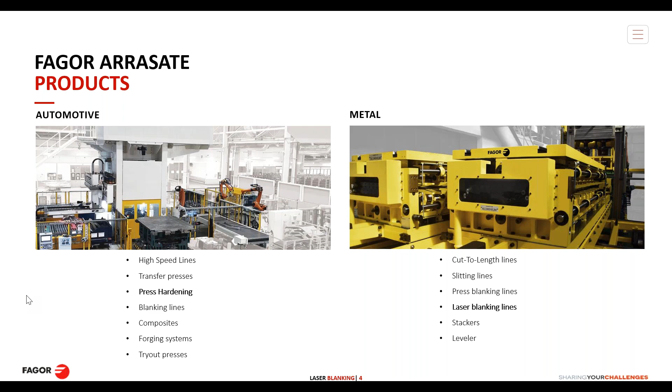After having a sales office in the U.S. for the last 25 years and a service agreement with Enprotech for the last 6 years, Fagor Arrasate is taking the next steps to be closer than ever to our customers here in the United States and Canada. Despite delays in 2020, which I think everyone can relate to, we have broken ground on the new facility regardless, and we're moving forward to complete that in May of next year.

The staff will be a mix of both expats and domestic natives. Disciplines on our staff are going to be sales, project management, controls programming, service and support coordinators, as well as spare parts. Hiring for the facility has already started. We have about 4 members hired already. One of those is a domestic employee here in the United States, and 3 of them are expats from Fagor, Spain.

And at this point, I'm going to turn the presentation over to John, who is going to focus on the technical portion of the presentation, starting with the concept of laser blanking lines. Go ahead, John. Okay, thank you very much, Matt.

So, in first place, I would like to introduce the laser blanking line concept for those who are not familiar with it. Basically, it's a blanking line replacing the press with laser cells and changing the stacker concept to linear robots so that they offer us bigger flexibility.

If we go to the inside of the cabinet, we could see that the laser area could be composed of 1 to 3 laser heads, and at the end we do have the flexible stacking system. The entry area is quite similar to a blanking line, avoiding big pits for the loop and for the press.

So now, to understand the line concept more easily, I will show you a video.

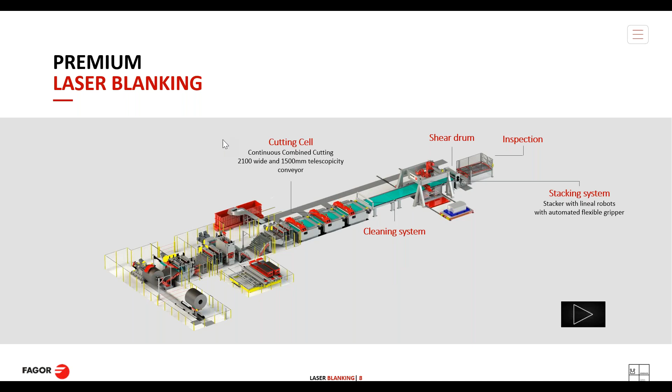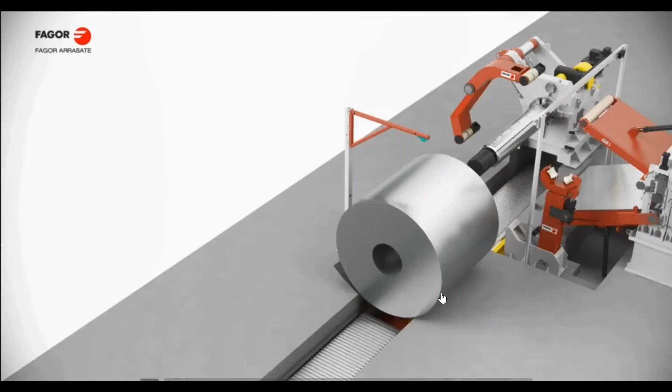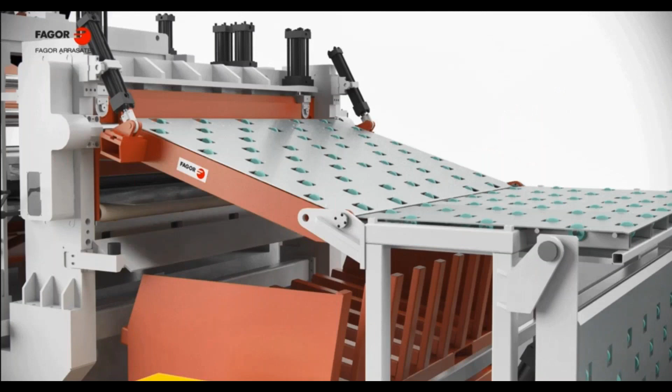The entry area, as I said, is common to cut-to-length lines or blanking lines, with coil car and uncoiler feeding unit, with a crop shear and the entry for the top of the coil. Leveling afterwards to remove the inner tensions and local effects that the strip may bring. Cassette change, we do it in less than 5 minutes.

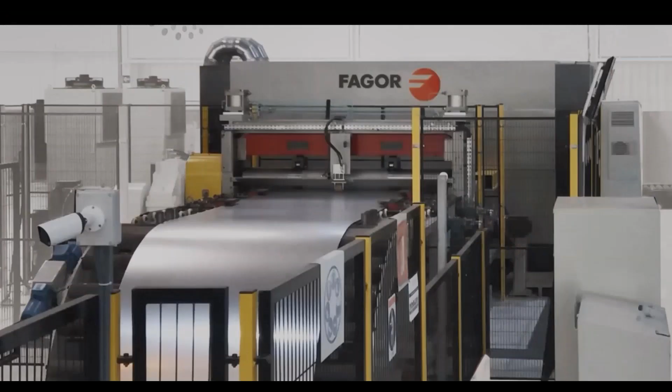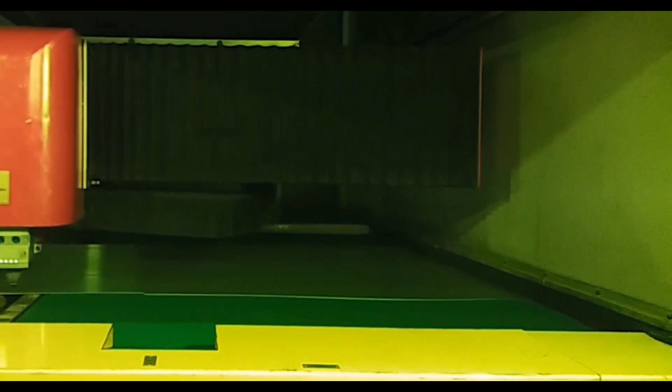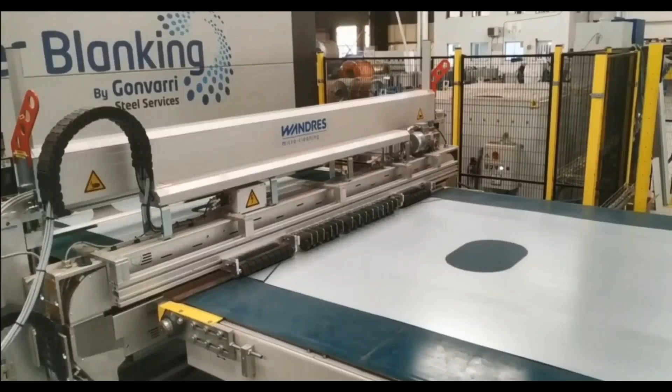Focusing on the laser area, any kind of pieces could be cut, single cutting or combined. Here, as you can see in the image, 2 lasers working together. Part of the scrap can be evacuated directly in the laser area, as you can see now, by opening the space between conveyors. Additionally, cleaning units can be added for skin panels, for example.

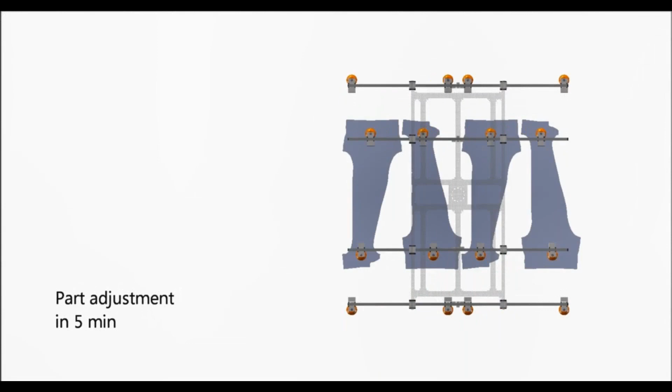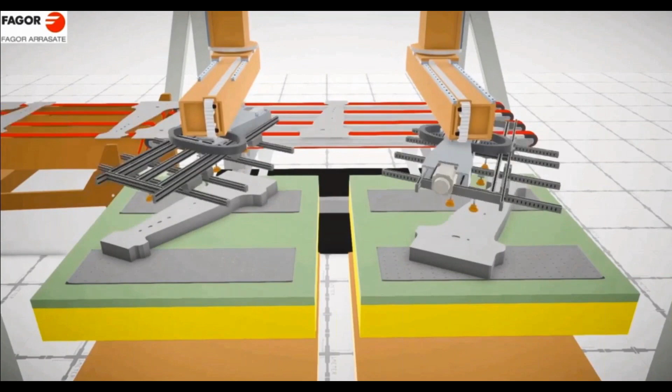At the end, we do have the linear robot stacking system with a vacuum cups gripper that, as you can see, can be adapted to the different blank shapes. Finally, the pieces can be picked up and oriented in the stacking pallets. At the end, we would have the inspection area and the rejection.

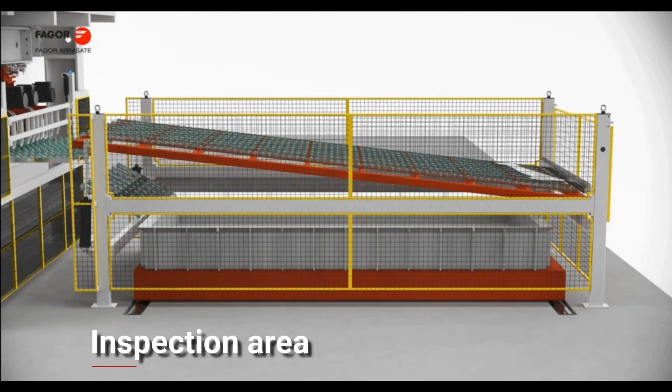So, continuing with the advantages that laser blanking technology provides the final users, in the first point we would have the most important point: the dies are not required for the cutting operation, so this leads to significant savings. For example, in the automotive industry, every 2-3 years the car models have a restyling, and every 5 years a new model is launched, so this requires new dies every certain time. The money saved there is quite significant.

And in another way, for model changing, laser cutting makes it easier to modify and go for new models just by changing the cut drawings. As a second advantage, fast changeovers are really a positive point of this technology, as there's no need to change the dies. Just by uploading the cut drawing to the system, the production can start running just by changing the recipe, and no die logistics or any other problems with die logistics affect the process.

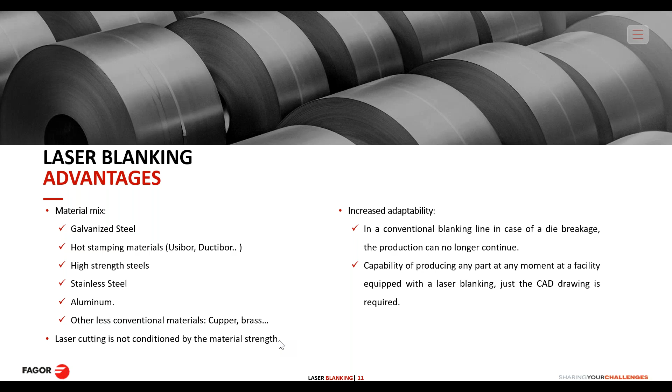About production costs, there is also a significant saving. Thanks to the nesting of the blanks, they can be positioned as desired, saving material. Additionally, edge trimming processes to adapt the coil width to the die width are not necessary anymore, so the cost of this extra process is saved as well.

Talking about energy consumption, there's a saving as well compared with the conventional blanking line. And less personnel is required for managing the line, not for operating it, but for everything related to die logistics.

Talking about maintenance, the savings are quite significant as well, as the maintenance operations are quite simple in the laser cell, and for example, qualified personnel for fixing dies, as required in a conventional blanking line, are not necessary. So in maintenance, highly qualified technicians would not be required.

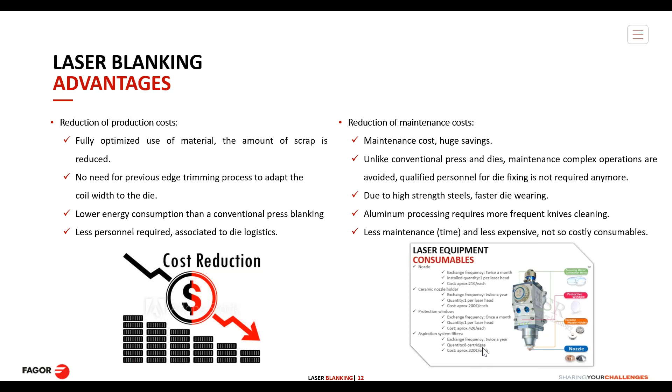About installation costs, there are quite big savings as well, as no pits, no high bay buildings, and no reinforced floor for press efforts are required. We estimated that only in foundation, over 600,000 euros can be saved.

And finally, there's a big space saving due to the absence of that as well.

We go through the productivities that the laser technology can achieve. With the laser technology, we have divided it into 3 different groups. Firstly, we have the inner parts, A pillars, B pillars, and other reinforcement parts that could achieve up to 25 parts per minute throughput.

Then there would be some simple blanks like rectangles, omegas, trapezoids. Those are quite fast parts, up to 35 parts per minute. And finally, large panels like side panels, up to 10 parts per minute.

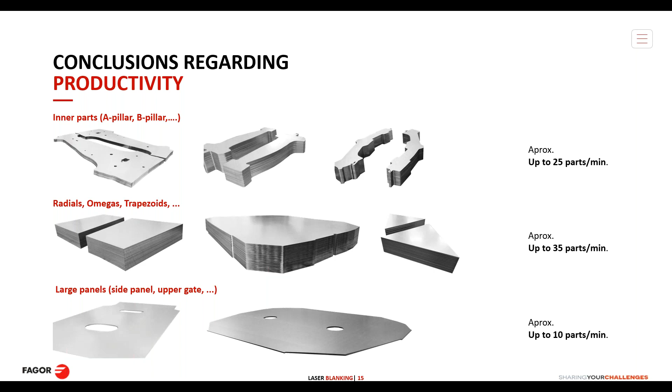There's a good point here: laser cutting allows us to make some modifications in the blank geometries, and these slight geometry modifications may lead to substantial improvements in throughput.

About the cutting quality, by laser cutting, the following tolerances can be achieved. As single cutting, we can achieve up to 0.4 millimeters tolerance. These blanks are cut by a unique laser head. Then by combined cutting, meaning the shape has been cut by two or more laser heads, the tolerance goes up to 0.7 millimeters.

Talking about linearity, the linearity that can be achieved is less than 0.1 millimeters per meter, and the burr is always below 5%, and in many cases nearly zero.

Additionally, a library is available for different materials and thickness couples, in order to achieve the best cutting conditions and the best cutting quality. Parameters such as the standoff, which is the height from the laser head to the strip, the gas pressure, the focal length, and so on. The library for different materials and couples is available and optimized for each case.

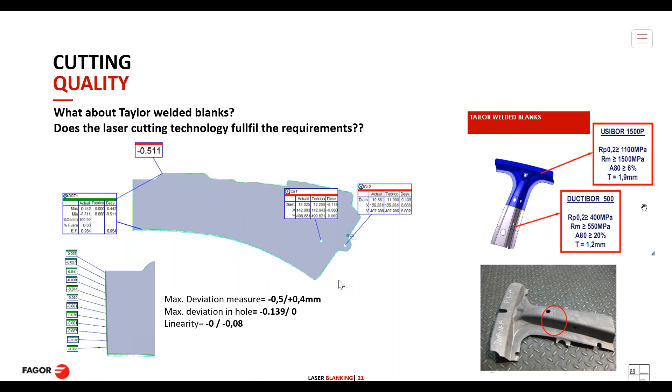This is as well a real example, and here we do have another real example of a tailor welded piece for a following tailor welded process.

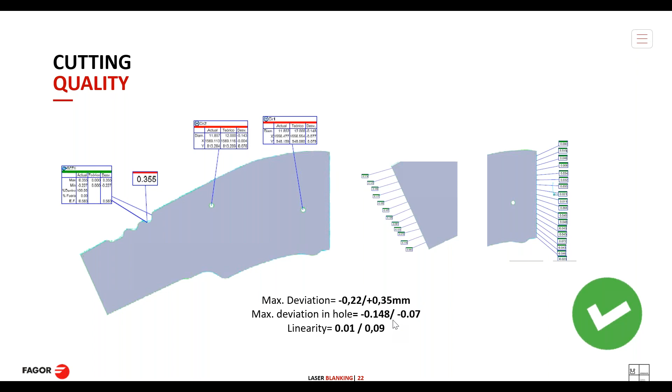So by mechanical cutting with a conventional die, the shearing process, especially with high strength steels, may provoke some edge micro cracks that could lead afterwards to blank fractures in the following stamping process. I'm talking in this case about cold stamping.

Additionally, as I said, less burr than in a conventional cutting process is generated, and this burr excess could also be a problem, because if in the forming process this burr is released, it might get adhered to the stamping die and generate some marks.

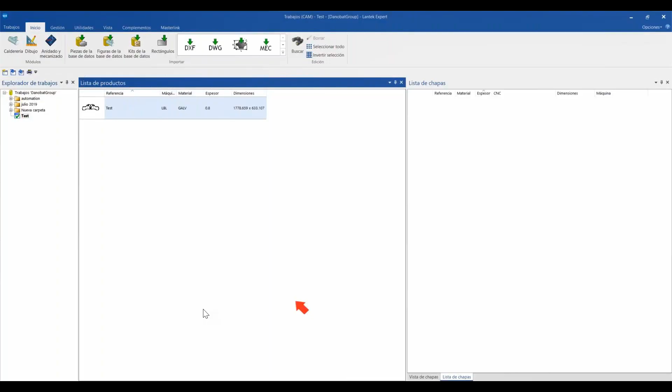This is an example of how easy it is to manage the nesting software. First, determine the area according to the coil specifications. Then we directly upload the drawing and position the piece as desired.

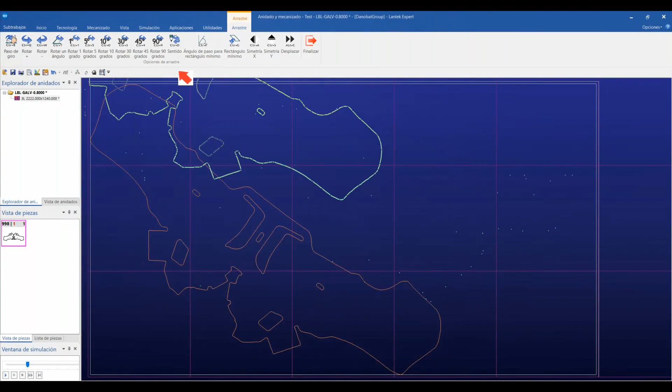This nesting can be done manually, or the software does it automatically. But by doing it manually, the human is capable of seeing different configurations that lead to a more optimum solution.

The pieces are picked on the fly, and multiple parts could be taken at the same time and then located in different positions. As I said before, if in the nesting a multi-piece cutting nesting is set up, as the one we can see here, which is a common distribution in hot stamping...

Those pieces could be cut, and afterwards the stacking unit will take the pieces and reorient them in order to position the blanks as required for the following hot stamping process.

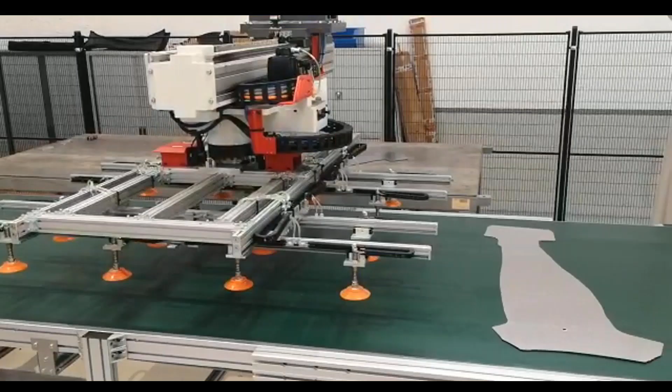This is quite interesting. Here we can see how the pieces could be taken on the fly and oriented afterwards in the pile as wished.

As a last point, I would like to highlight how laser technology can help us reduce the time to market in a new model launching process.

From one side, the blanking die and design manufacturing are not required. I'm talking about the cut blanking, not the hot stamping die. This leads to shortening the launching process by a couple of months.

Additionally, in the industrialization of hot stamping parts, it is an iterative process until the optimum is achieved. It's a trial and error process where different blank shapes need to be tested in order to see how the material flows in the hot stamping die, and to see which is the most optimum geometry.

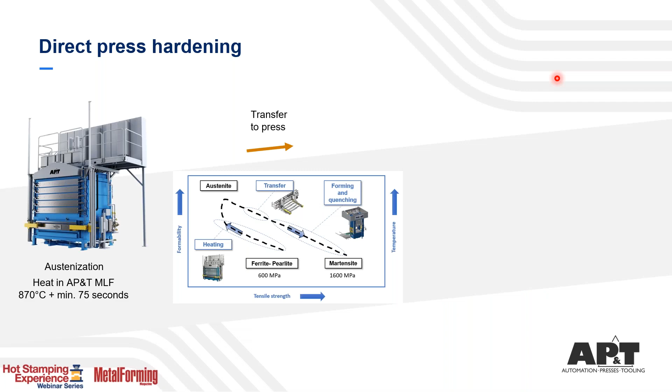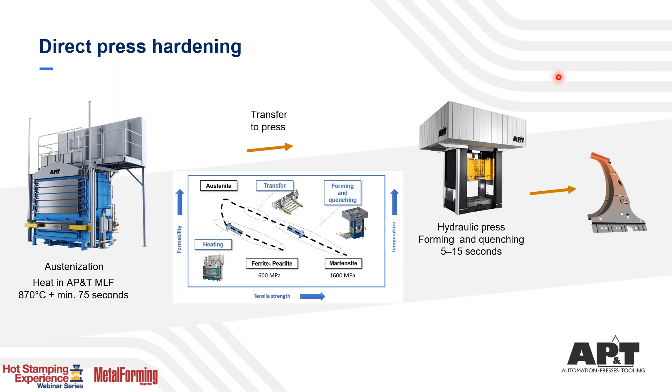I would like to go into the quality influencing process parameters when talking about direct press hardening as the first part of my presentation. Everyone in this meeting knows about direct press hardening. We have an austenitization phase in a radiation furnace, a transfer to the press where we do the forming and the quenching, and then we get a final hardened part out of the quenching die.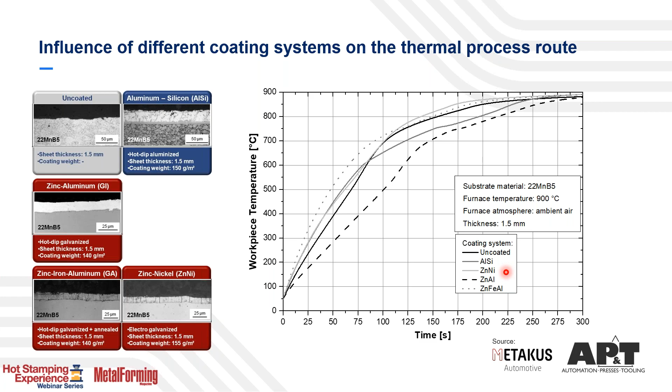Next on the chart here is a comparison between different coating systems. The chart shows uncoated material, aluminum silicon coated material, and zinc coated material. You see clearly, depending on which coating you use, you have a different heating characteristic on your material. So you need to know in your press hardening process what type of material you use, because this heavily influences your thermal behavior when heating up the material.

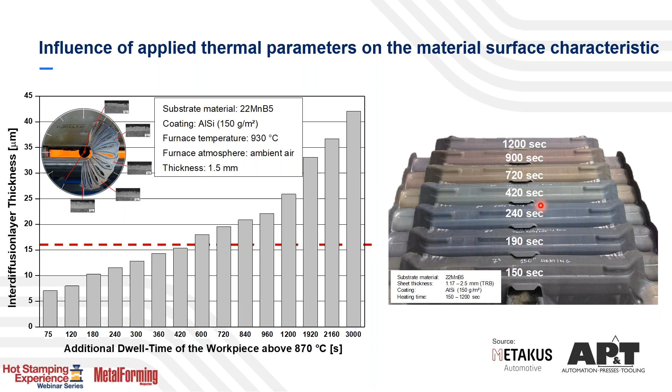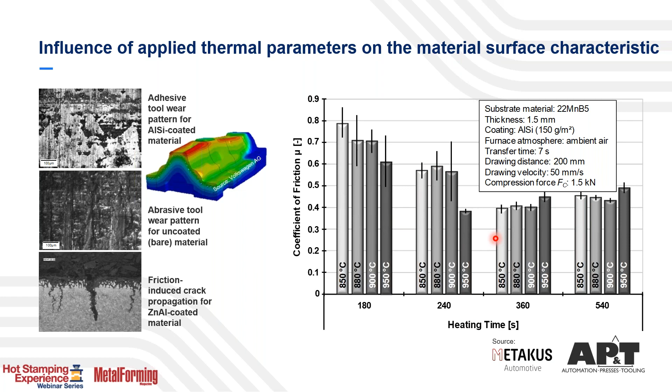On the next page, we see the influence of different heating times and different final temperatures on the coefficient of friction. That's very important to understand in the press hardening process, especially when thinking about die wear. High roughness leads to more adhesive and/or abrasive tool wear, which of course we'd like to avoid. So you need to find a temperature-time setting which gives the best results in terms of the coefficient of friction. We're somewhere in this area here, where you can manage less abrasive die wear, and you don't need to maintain your dies as often.

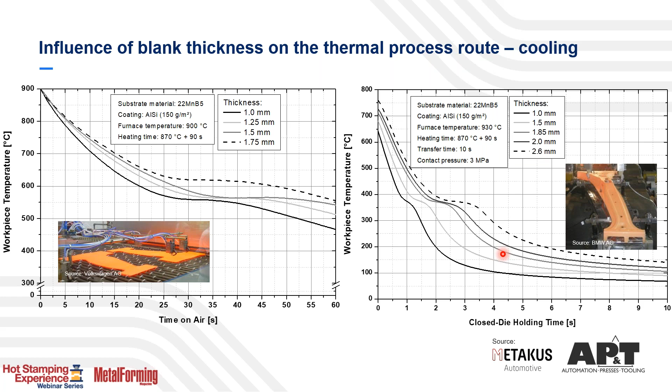Then we have the influence after forming. We had the heating process, the quenching process, and now we're going into the cooling process. Different sheet thicknesses affect cooling when transporting the blank in air, prior to hot stamping, and here we have different quench rates for different thicknesses during the quenching process. So depending on which sheet thickness you're using for the final component, you need to calculate with different cooling rates while transporting the blank in air. The same goes for quenching in a die—larger thickness requires a longer quenching time, or closed die holding time, in the tool.

It costs a lot of energy, but it's actually not needed because you need to find an optimum contact pressure to apply in order to get sufficient cooling. So it's a trade-off between cycle time and energy consumption.

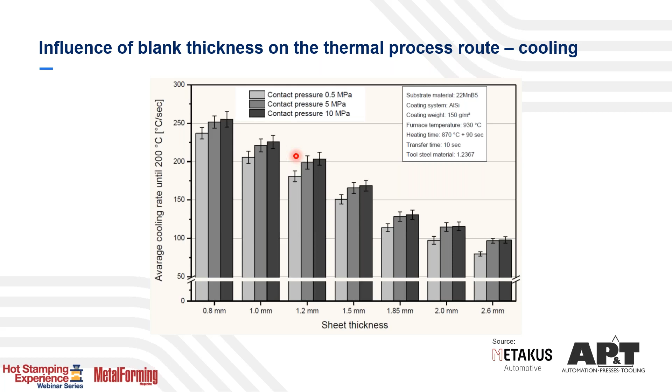That is your process window, where you can still reach the right properties in your final coating, in relation to total coating thickness in the final state, and also the thickness of the interdiffusion layer. Since this presentation will be sent out, I think this should be one of the standards for defining or setting up the heating process in press hardening lines.

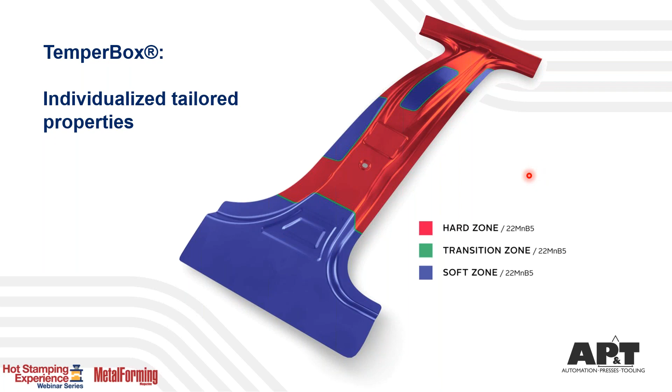I will go a little bit further into the process. Similar to the direct process we have in austenitization, here's an example of a multi-layer furnace. That's our own product.

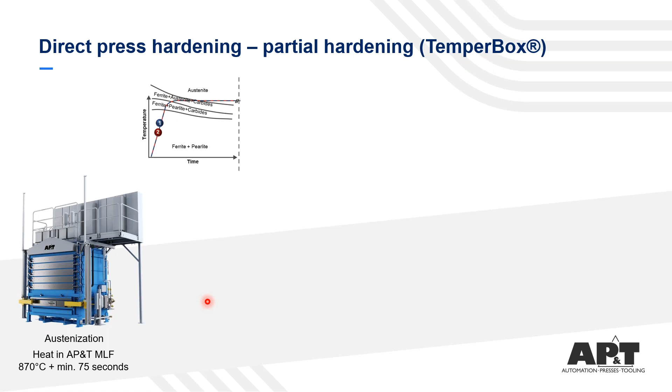This is the new product, basically, where we combine conventional multi-layer furnace chambers, five pieces of them, with a temper box in the bottom of the furnace. You will see some product pictures later on as well. So we have the austenitization.

After the austenitization, we transfer the blank into the temper box. Depending on the final mechanical properties you would like to reach, and depending very much on sheet thickness, we have a time inside the temper box that varies roughly between 30 and 70 seconds.

So what we are doing in the temper box is keeping certain areas that we want to have hard after the quenching process on temperature in the austenite state, and the other areas we actually cool down close to the transition from face-centered cubic into body-centered cubic, into the ferrite-pearlite state. Because when quenching this part, certain areas in austenite and certain areas in ferrite-pearlite will not be martensite afterwards, which means they will be soft areas.

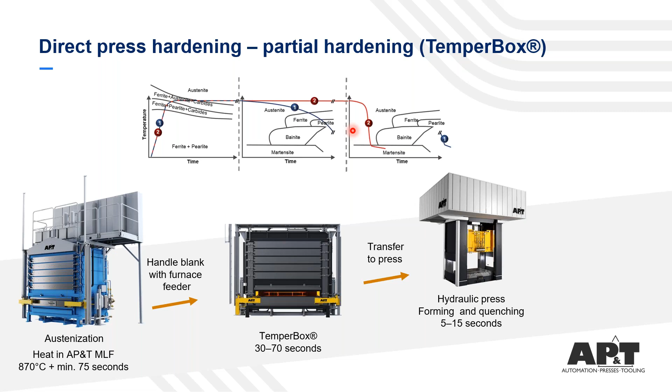After the heat treatment process in the temper box, we conventionally transfer the blank into the press, into the forming die, where we have, again depending on sheet thickness, a quenching time between 5 and 15 seconds. And what you get is a part with quite localized tailored properties, if you wish so.

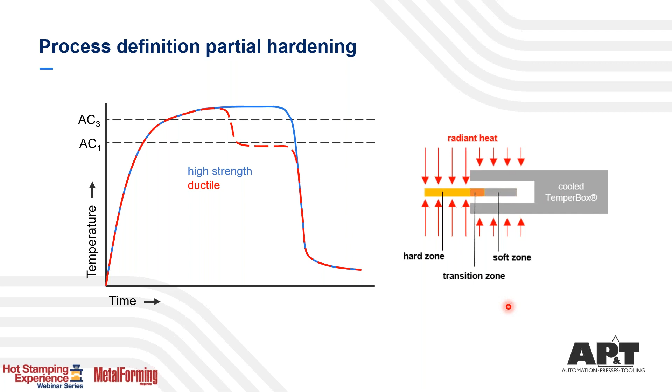How does the process look like for the temper box? As I said before, we have the austenitization, we have the local cooling, and certain areas we keep on temperature. How do we do that? Inside this temper box, inside this furnace cavity, we have the so-called cooled temper box, which is basically water-cooled masks, where we block certain areas on the blank from the radiation inside this furnace chamber. And what we achieve by blocking these areas from the radiation is, you will see on the next slide, a cooling effect which is similar to cooling the blank on air.

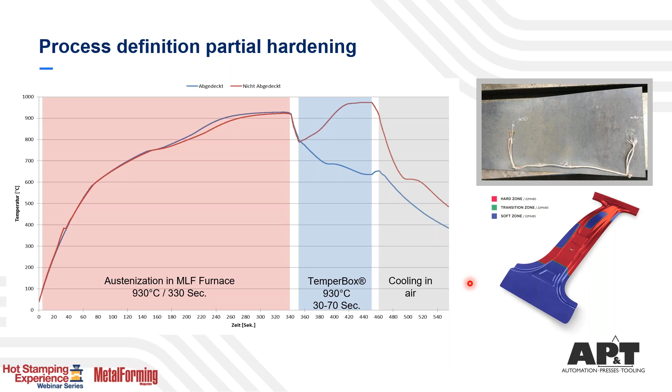I also brought you a short video, which I would like to start now. This is a prototype line at a tier 1 in Germany, the company Gedia. We have been heavily working together to industrialize this temper box technology. What you can see now is the conventional austenitization chamber in our multi-layer furnace, and the furnace feeder fork then transfers the blank into the temper box, where you can already see now the two cooled masks.

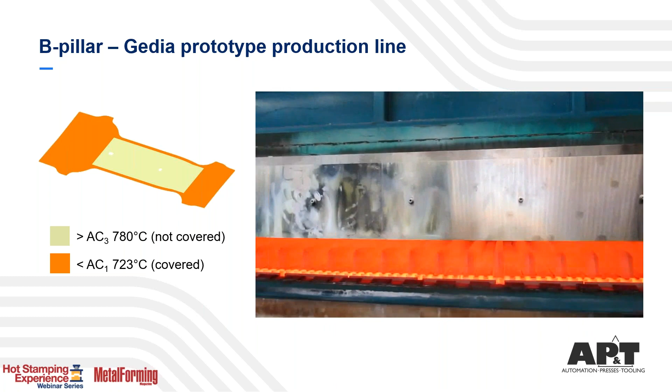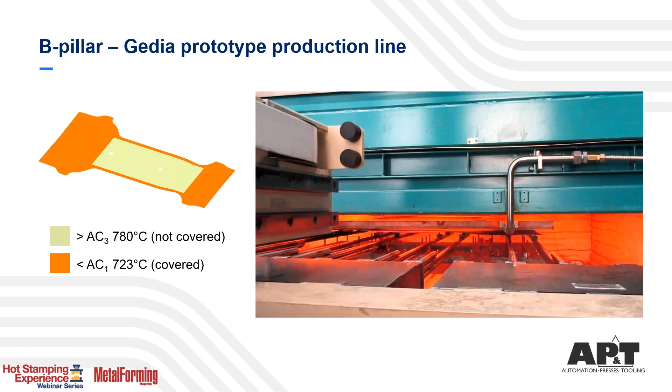We drop the blank on pins and move the lower mask towards the upper mask, so that we have the same distance between mask and blank on both sides. We keep it in there, as I said before, depending on sheet thickness, for 30 to 70 seconds, depending also very much on what type of mechanical properties you would like to reach. So thank you very much to the company Gedia for providing us this video.

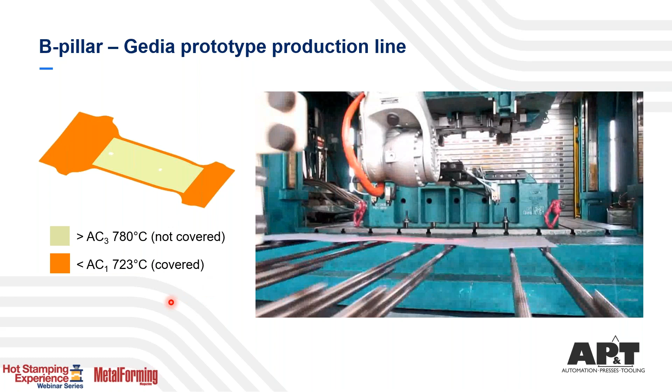I would also like to now go into further details. One important topic for tailored heating is, of course, the transition zone. And here the temper box provides a neat functionality, because we can actually vary the transition zone. How to do that? I think we should discuss in a more private discussion, but we have possibilities to vary the transition zone from hard to the soft area.

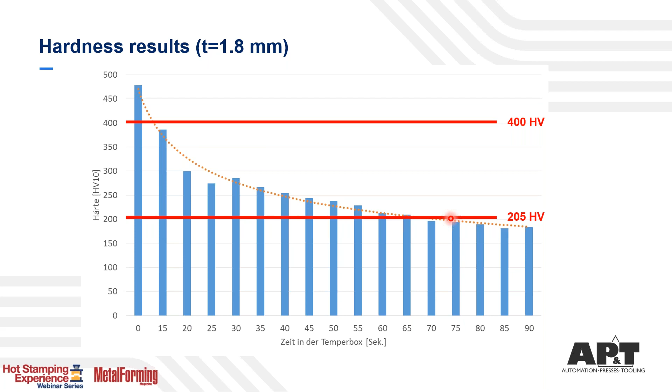So if you have the blank too short in your temper box, you will not reach the lower end or the upper end of the soft zone. If you have it too long in the furnace, you basically reach the properties of the soft zone, but maybe you lose in cycle time. So what I wanted to pinpoint here is that it's really important to know the process you are going to follow and which parameters you should set in your press hardening line.

In my next slide, I would like to show you what we think is the new standard of press hardening lines, and we are very proud that we already had the possibility to deliver these types of lines. Maybe some information on the side: AP&T is the market leader in press hardening, because we have delivered more than 120 press hardening lines on a global basis.

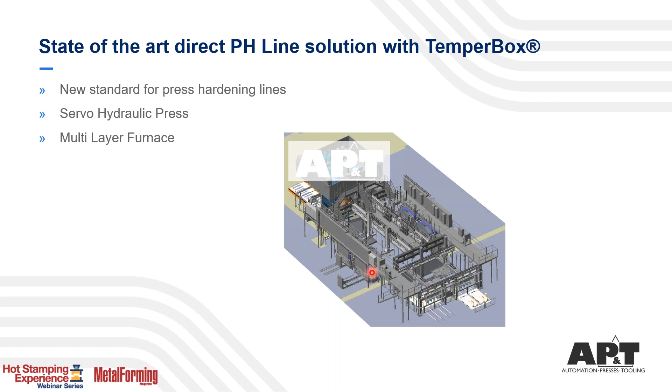In this line, typically we would use 4 towers of this multi-layer furnace combination with temper box. In total, we have what we call furnace feeders - those are the feeders that feed the cold material into the furnaces, and also the hot material from the austenitization chambers into the temper box, and out of that into either the centering table or directly into the press, into the forming die.

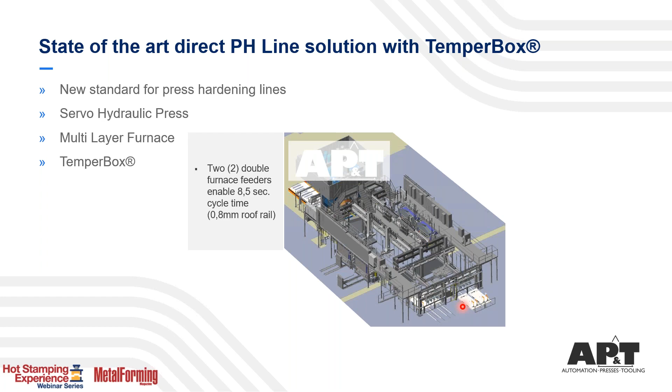If we run monolithic parts, and that's the nice thing with this press hardening line, we can run either the temper box process or conventional press hardening to create monolithic parts. If we run monolithic parts for a 0.8 millimeter roof rail, with those 4 furnace feeders in total and 20 austenitization cavities, we do reach a cycle time of 8.5 seconds.

A footprint of such a line is 16 by 16 meters, and this is what we have been focusing on from the very beginning since we started using our own furnace concept - reduction of floor space, which you can also see on this type of line, achieving quite a small footprint.

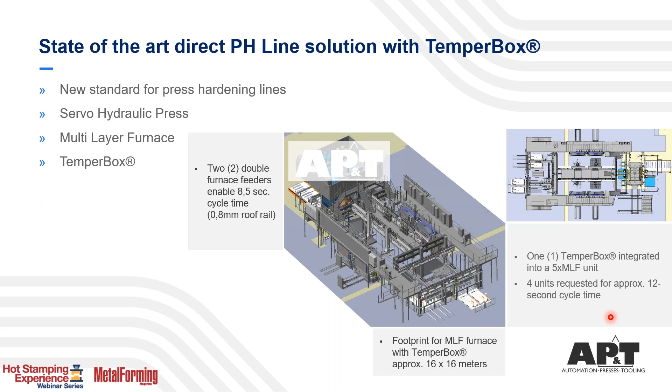As I said before, we have 4 of these multi-layer furnaces, including the temper box integrated. And if we would go back to a 1.5 millimeter thick material, we are able to reach cycle times of 12 seconds with this type of layout of our latest press hardening line.

Now, the second part, why I did all this introduction, is actually the inline process monitoring. The question here is how to monitor quality-influencing parameters. So the first part of the presentation was the introduction to what is actually important to watch in the press hardening line, and now I come to the inline process monitoring part.

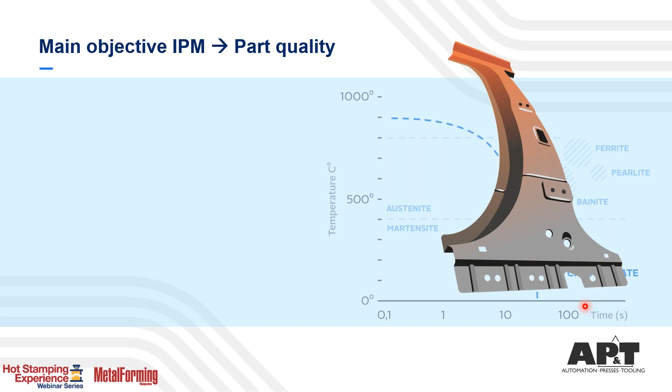The main objective here is, of course, part quality - to detect process variations and faults, to limit those variations and faults, to also detect die and machine wear, and process and product traceability, one important reason for having inline process monitoring, and of course log files to report to OEMs in case they would like to see those specific log files.

In addition, we can think about process and line optimization. It's an important part when you would like to optimize the process and the complete production line, also for energy consumption optimization. It's important to have this inline process monitoring in place, and for reduction of the scrap rate. What are the most important parameters for process control?

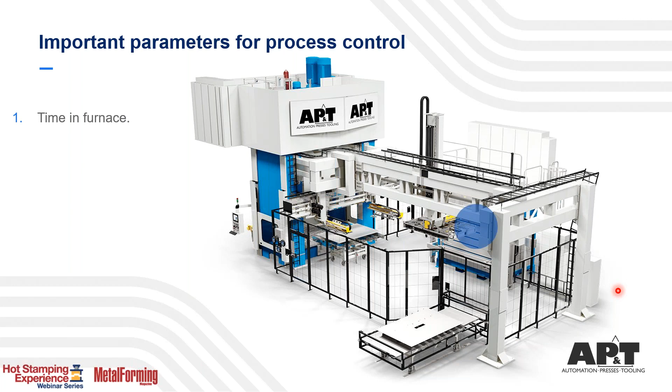We have here sketched a small tryout line, as we also have it at our headquarters here in Sweden, in Ulricehamn. The first parameter we need to monitor is time in furnace. Secondly, the temperature in the furnace - we all heard these influencing parameters in the first part of my presentation, now you see that you need to monitor them as well.

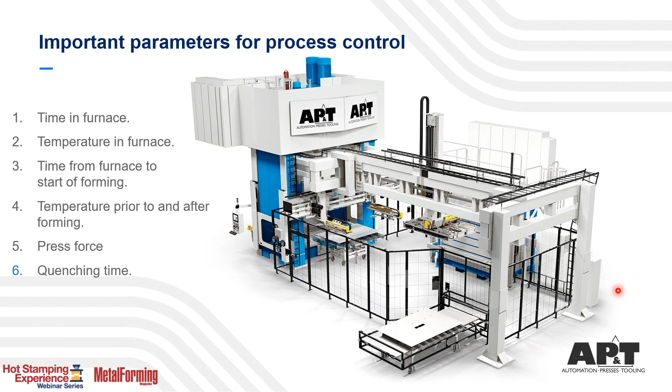Then the time in air from furnace to the start of forming needs to be monitored, temperature prior to and after the forming, press force, quenching time, the cooling water flow and the cooling water temperature, and hotspot detection after quenching.

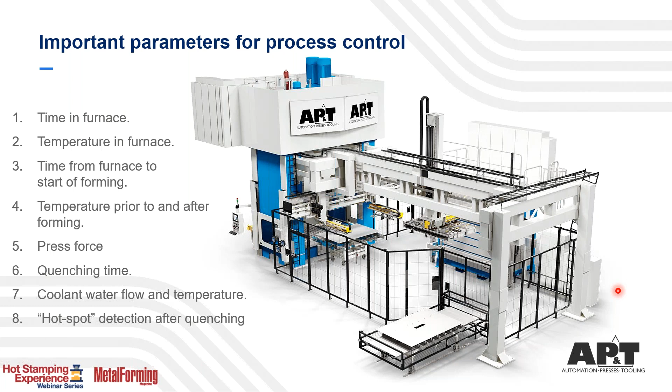Those are the most important parameters that we would like to monitor and later on also control in a press hardening line. How do we do that? What type of equipment do we use as our standard?

We use Siemens as our partner for the automation part of our product portfolio, with the Siemens PC installed on the floor on a floor standing cabinet. Pyrometers we use from the company Keller, thermal imaging cameras from the company FLIR, and also from FLIR those motorized pan tilt units.

The motorized pyrometers with automatic repositioning for temperature detection are based on the front and the back of the press, where you measure certain spots or certain areas on the hot blank when going into the die and before quenching, and then as well after quenching.

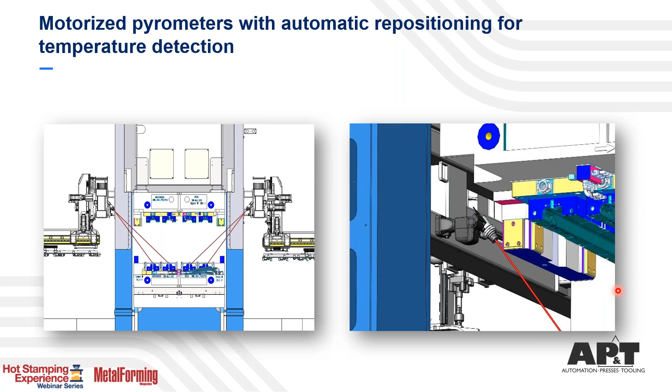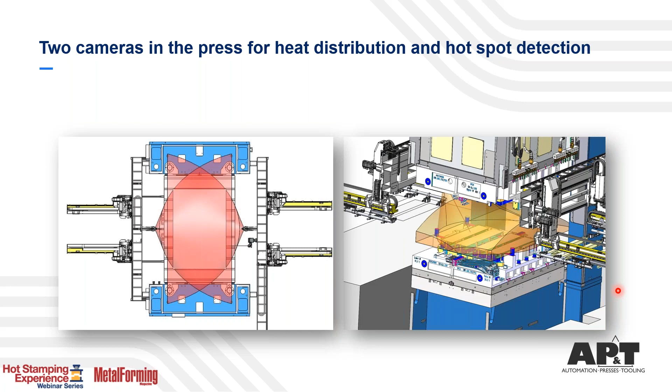Two cameras that we would recommend to install, where we have incoming temperature measurement when coming in with the hot blank, as well as after opening the die, where we have hotspot detection. So we measure heat distribution in the blank, which gives you an idea about your heat treatment process in the furnace, where you can detect failures if something is wrong. And more importantly, hotspot detection for checking on die wear, an important parameter to watch.

In addition, we offer cameras for part positioning in the dies to see if parts are possibly misaligned. So what do we recommend as a complete system? At least one motorized pyrometer, depending on how many cavities you run in your dies, and two thermal imaging cameras, and of course the process control system.

What we achieve with this recommendation is easy targeting. All the parameters and camera values are set on our HMI, our main control panel. We have a short setting time when introducing new parts, and an automatic setting during product change.

We can look at heat distributions prior to quenching, which goes as well for tailored welded blanks and tailored rolled blanks. There's also hotspot detection in stereo view after the quenching, after opening the die again, and the optimization of quench time depending on how much temperature is left in the part when opening the die. This system fulfills all the demands for CQI-9 conformity.

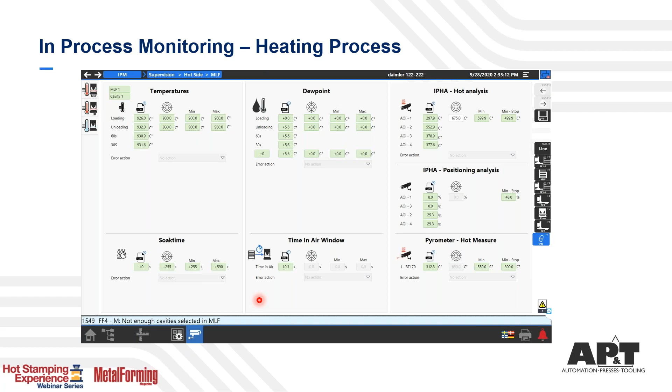This is the monitoring part as well as the control part, because what we can do here is set limits, set boundaries for certain parameters that we would first like to monitor and collect data, but then also use those boundaries to control the process. So in case you go out of those boundaries, you can set certain conditions in the press hardening line for what should be done with those components that are out of bounds.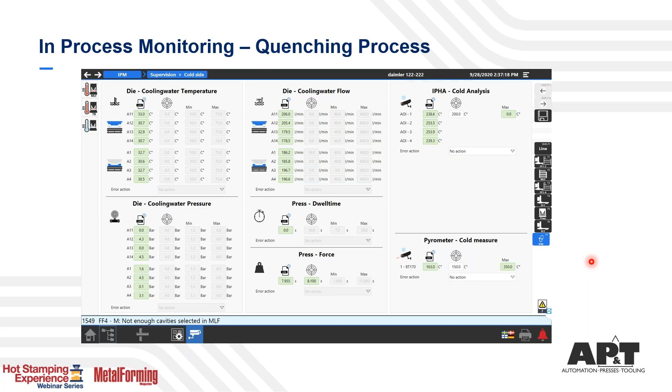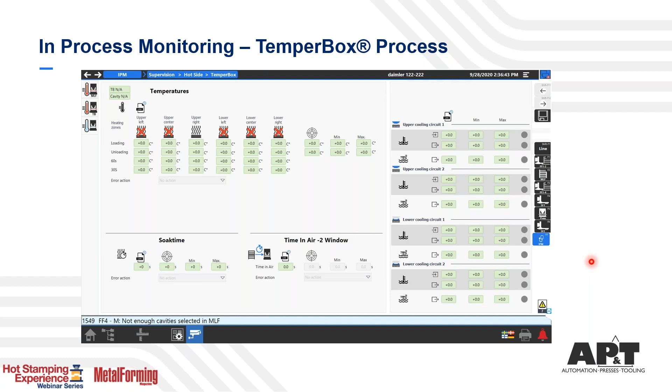Before I come to my last slide, what is next at AP&T, I would like to shortly summarize my presentation. You have seen a lot of slides on different parameters that have a large influence on the part quality. It's a funny story - I have been talking to so many line operators, and I typically go into different types of discussions with them. But interesting was once where I asked the operator, 'Can you tell me why you heat up the blank?' And he said, 'Yeah, to make it better formable.' So this should tell you a little bit.

We need to still create awareness that press hardening is not an easy process; it's a highly complex process. We need to create awareness that this is actually a heat treatment process, and those OEMs - mainly all OEMs using press hardened components - are using that for a good reason, to create safety relevant components in their cars. So we as machine suppliers and also the stampers out there, we have a certain responsibility to make sure that we don't get tailored properties into our parts without forcing them into the part, if you know what I mean.

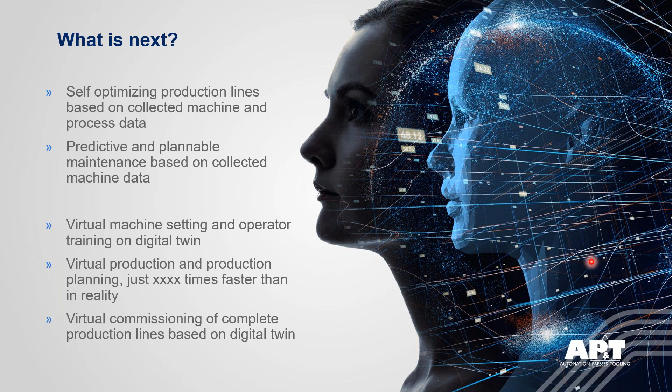But I'm at the end of my presentation, and I would like to thank you for your attention, and I'm happy to receive your questions. Thank you. And last but not least, I need to say, trust is good, but to monitor and to control is actually better.

Very good. Thank you, Christian. We do have some time for some questions. You did a great job of really explaining how complicated the process is, Christian, but also how the technology is evolving to make the process that much more repeatable and predictable. So we talked a little bit on Tuesday about the impact of die wear on the process, and particularly the contact between the part and the tooling. Are you able to monitor die wear in any way through your process?

Yeah, by having the inline process monitoring cameras where you can actually detect hotspots. So typically hotspots are found after opening up the dies and looking at the parts with the thermal imaging cameras. If you see hotspots, this is a typical indication for local die wear.

The question is, what happens to blanks that leave the furnace for whatever reason at the wrong temperature to go into the press? Are those parts reheat treatable, or do they typically get scrapped? No, they typically get scrapped. But what you see, we have a quite large window - yeah, it's actually not that large. We saw in the first part of the presentation a lot - you can influence the surface roughness, the coating thickness. So if you are outside of the window, then you are outside of the window. Scrap the part, don't reuse them.